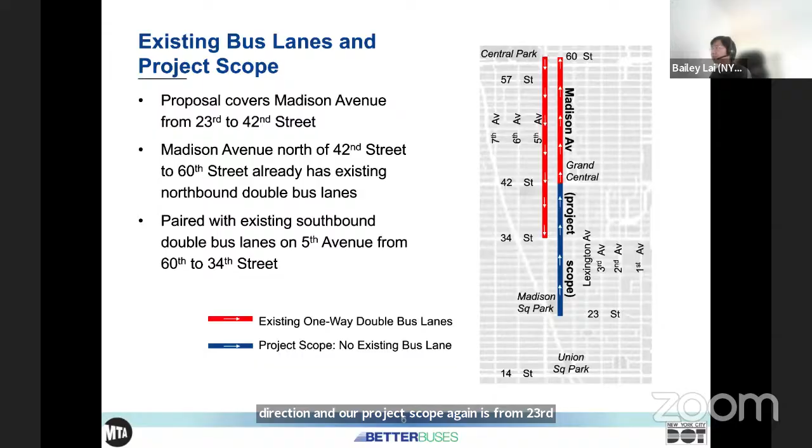Just to give you more visuals of double bus lanes, since not everyone is readily familiar with them, as you can see here, both 5th Ave and Madison Avenue have double bus lanes on the right side of the curb if you're looking in the direction of travel. I also want to point out that the 5th Avenue double bus lanes actually connect to singular bus lanes that extend the entire east side of Central Park, all the way from 110th Street down to 60th.

In our evaluation of the existing double bus lanes for 5th Avenue, we have much more recent data as it was implemented more recently in 2018. Between 2017 and 2019, the data showed that speeds on local routes increased 6 to 12%, and speeds on express routes increased 11 to 20%.

With that being said, I hand the mic over to Jamie to talk more in depth about bus routes and bus speeds on Madison Avenue itself.

Hello, good evening everyone. My name is Jamie Cho, and I'm a bus service planner at MTA New York City Transit. As Bailey mentioned earlier, 34 bus routes travel within the Madison Avenue study area, with 5 local routes and 29 express routes. Most of these express routes travel via the entire segment, with local routes beginning travel on Madison Avenue at either 25th Street or 32nd Street. On an average weekday, over 1,000 buses travel within the study area, with almost 8,000 daily aggregated boardings and alights at the bus stops there.

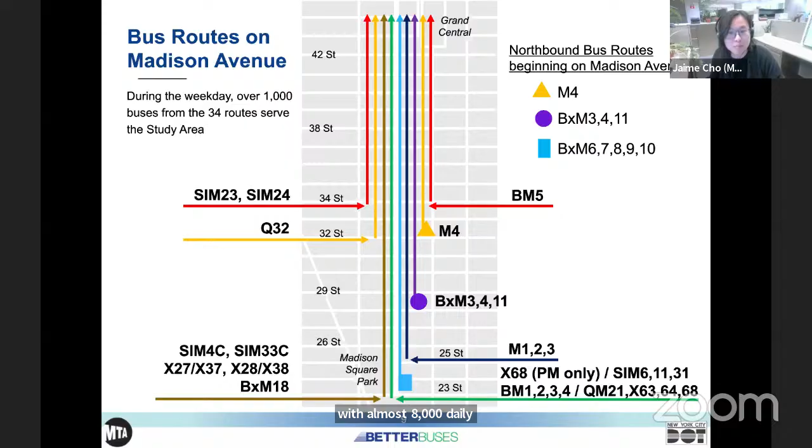If we go on to the next slide, the speeds: overall, local bus speeds are slow all day in the study area. These maps show the average bus speeds of the local and express routes on weekdays during the AM peak, midday, and PM peak. As shown, local bus speeds are under 6 miles per hour throughout the day, while express bus speeds are under 9. During the midday and PM peak, bus speeds are especially slow, with local speeds dipping down to 4.5 miles per hour between 27th Street and 33rd Street in the midday, and express speeds down to 5.2 between 33rd Street and 42nd Street during the PM peak.

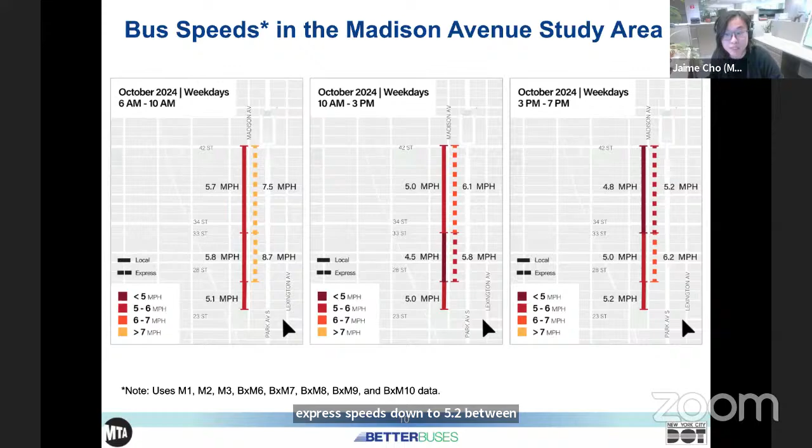So with that in mind, we also wanted to take a look at the existing general traffic volumes and speeds on the corridor to match up the data that we were seeing for bus speeds. Over here at DOT, we have done a traffic analysis to not just look at the traffic volumes and speeds, but also look at potential viability of our project proposal.

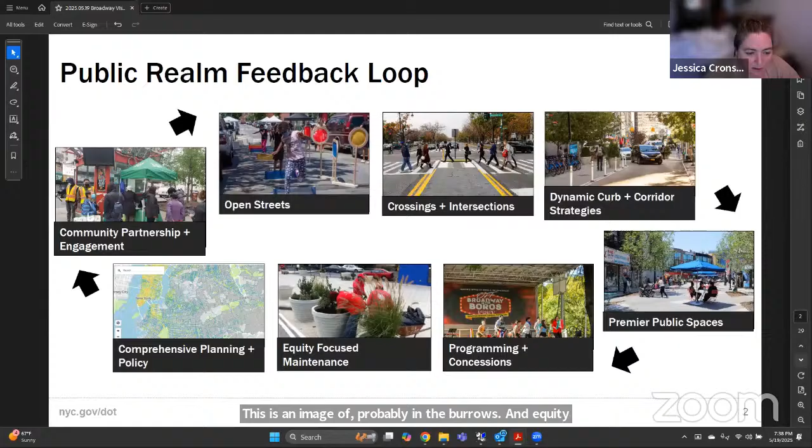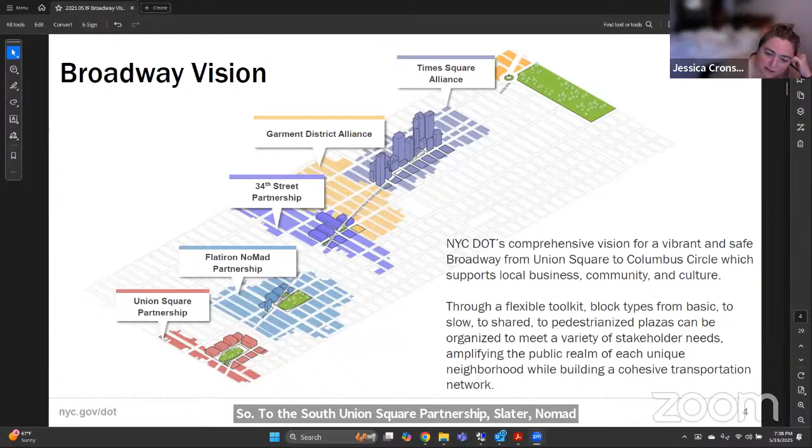Next slide. So we have been working on Broadway for many, many years now, and all of these efforts are made possible by our partnerships along the corridor. To the south: Union Square Partnership, Flatiron Nomad Partnership, 34th Street Partnership, Garment District Alliance, and the Times Square Alliance. Slide.

And that leads us into our 2025 goals: looking at a cohesive refresh between Herald Square and Times Square, creating a new plaza block between 35th and 36th, and updating the shared street geometry on 41st and 42nd, paired with comprehensive capital scoping. That's the project you've seen most recently between 38th and 40th.

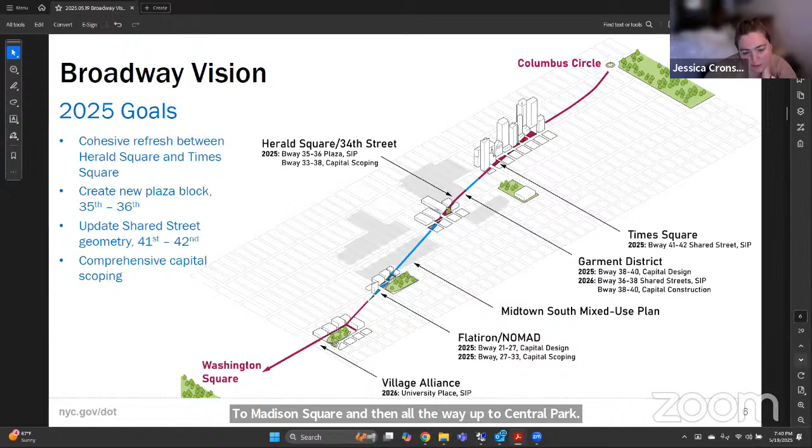This is an image showing a map of Broadway and how it cuts from park to park, connecting Washington Square to Union Square to Madison Square, and then all the way up to Central Park, highlighting the work we've been doing here across the years. Next slide.

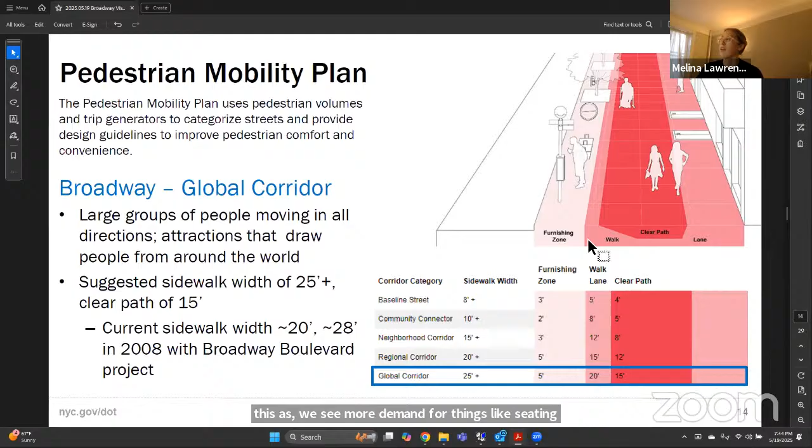Broadway has a lot of tourists, a lot of folks moving in and out. It's at our highest category, global corridor, which recommends a sidewalk width of about 25 feet. Right now we're at a full sidewalk width of about 28 feet after we added in some plazas and programming a few years ago. But we really want to think about this as we see more demand for things like seating elements and planters that live in the spaces we're creating, forming a furnishing zone.

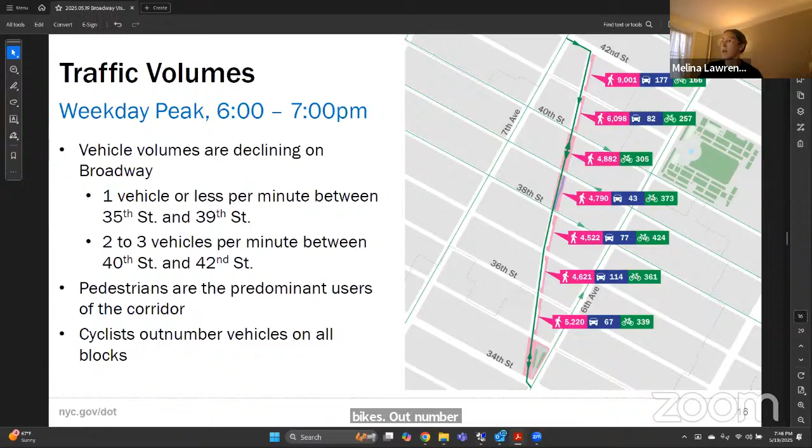So we've done a bit of public engagement and we have a survey open. We were out there on the street last Thursday between 12 and 4:30. We spent a couple hours in Garment District and then moved our way south towards Herald Square.

Majority of the folks that we talked to and have responded to our survey so far work in the area, or find themselves in the area for shopping, dining, and kind of leisure activities. Walking is the predominant mode used on Broadway, over 90% of respondents.

Thinking about the pedestrian experience, folks reported that they usually feel safe from vehicles on a scale from always, usually, occasionally, to never. Pedestrians also said that they usually feel safe from cyclists and other micromobility users.

From a cyclist or micromobility perspective, again the highest amount said that they usually feel safe from vehicles, but 22% reported feeling a little less safe occasionally, and 14% reported feeling not safe from vehicles ever.

We also asked about some of the plaza, shared streets, and two-way cycling, and got a mix of positive, neutral, and negative comments.

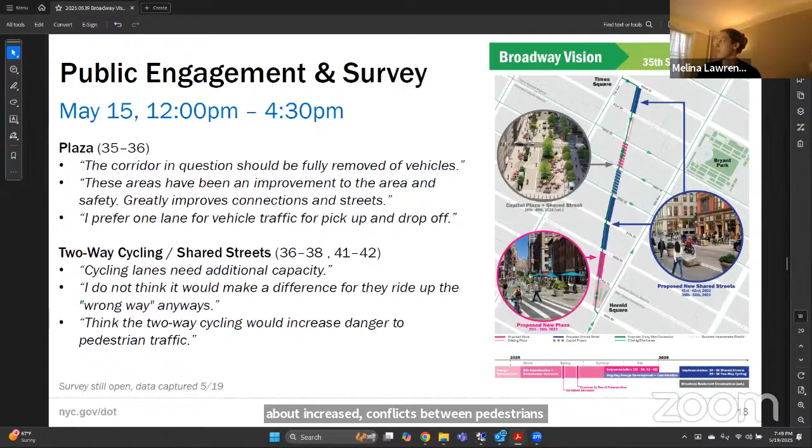As Jessica mentioned, we're looking to phase this out over 2 years, so there are 3 diagrams. One showing the existing conditions, which are 2 plaza blocks, one in Herald Square between 34th and 35th, and another between 39th and 40th, a shared street between 38th and 39th, and then the rest of the corridor is kind of like a slow block typology where we just have that pedestrian or plaza space attached to just the east curb.

In 2025, highlighting the 2 blocks that we're looking to do this year: the plaza block adjacent to the existing one between 35th and 36th, and then looking to improve the geometry between 41st and 42nd to more of a shared street design.

So adding in a bit of chicaning to keep vehicles slow, and then also adding some additional materials shown in the images at the beginning that Jessica went through, where we have an additional brown epoxy gravel added to the travel lane.

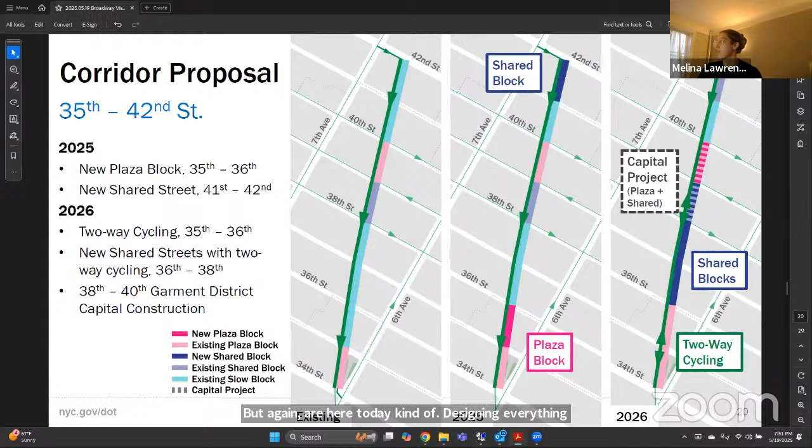Now moving into the renderings for the design. This is Broadway between 35th and 36th, where we're looking to do a plaza block and expand the programmable space adjacent to Herald Square. As Jessica mentioned, they did a holiday market in the open street and are looking to continue doing similar events.

So in 2025, we would look to maintain southbound cycling, expand the amount of plaza space that exists on this block, and then also reconfigure the existing CitiBike station. Currently, that lives where this green paint is. We would look to move that, relocate it somewhere in the vicinity.

And then in 2026, once 36th to 38th begins, we would convert this block to two-way cycling. What we'd implement this year would feel like an extra wide bike lane, because next year we would add a yellow center line down the middle and make it two-way.

Sorry, jumping in super quick, just to add to that — that width is also necessary because that is also the FDNY access path. Yeah, thank you. Yep.

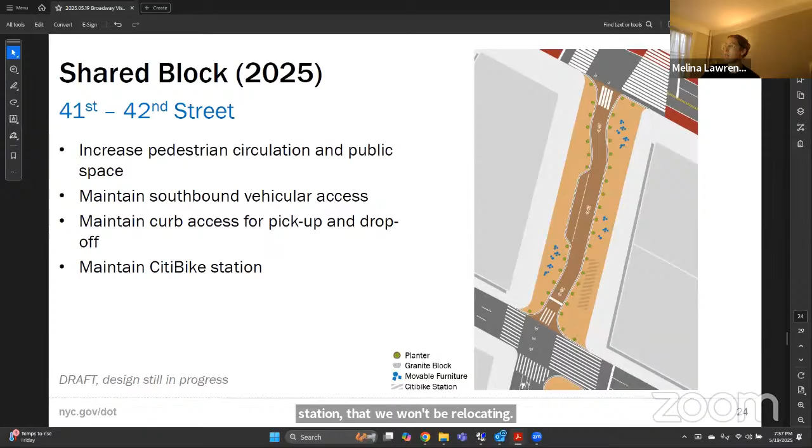Taking a look at curb management, right now the existing regulations are called out on the blocks we're working on. There are two diagrams, existing and proposed, highlighting curb regulations between 35th and 38th and 41st and 42nd. Right now the regulations are 3-hour commercial metered parking during the day, transitioning to 2-hour metered parking in the evening, with a little bit of no standing any time between 41st and 42nd.

What we're looking to do is maintain those existing regulations where we're maintaining curb access, and based on feedback from specific stakeholders between 41st and 42nd, and between 36th and 37th, we're potentially looking to add no standing any time, which would facilitate pickup, drop-off, and quick loading for events. But as with the 36th to 38th blocks, this is still a little bit in flux as we continue conversations with stakeholders.

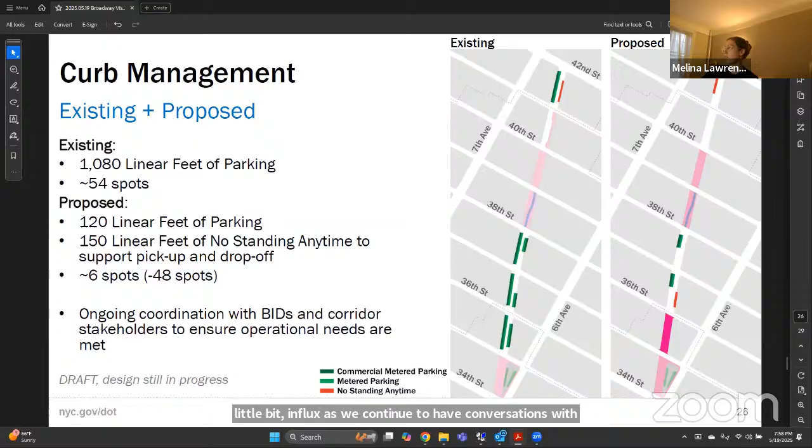And then the last thing is timeline. We kind of started this kickoff after the holiday market meeting with the BIDs, which include 34th Street Partnership, Garment District Alliance, and Times Square Alliance, and have been meeting with some of their stakeholders throughout the course of winter and spring. We did some on-street outreach and a survey last week and are here with you all today.

Looking again to implement 2 blocks this year, the plaza between 35th and 36th, and the shared street between 41st and 42nd. And then in 2026, once capital construction starts, the 2 other shared street blocks between 36th and 38th, and then just adding that yellow center line to the bike lane between 35 and 36. And that is the end of the presentation. If there are any questions, thank you.

Thank you so much. I think this is one of the most important projects in all of New York City. So thank you. And this is long-term. And if we can remain future focused in our thinking, it'll be tremendous. I'm so pleased that Office of Public Realm is involved, because almost every single city agency and department will have to be involved, certainly all the BIDs, all the committees on this board. So thank you so much.

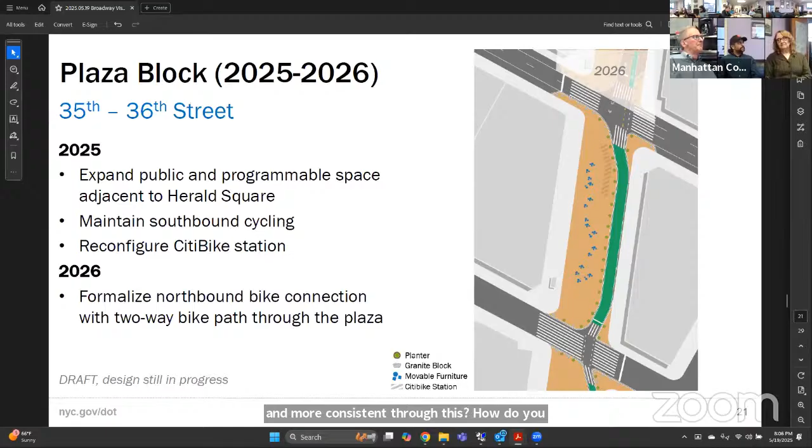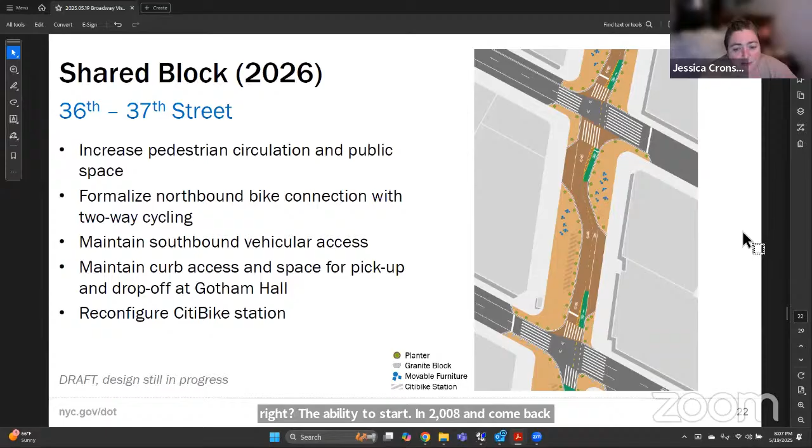What a good question. I think we've landed on a design language based on the experimentation we've been doing over the years. As I said at the beginning, we've been given the gift of time on Broadway, the ability to start in 2008 and come back multiple times to the same location on the corridor, and then have that inform the capital project. With in-house materials - Melina, do you want to pull up the capital rendering super quick?

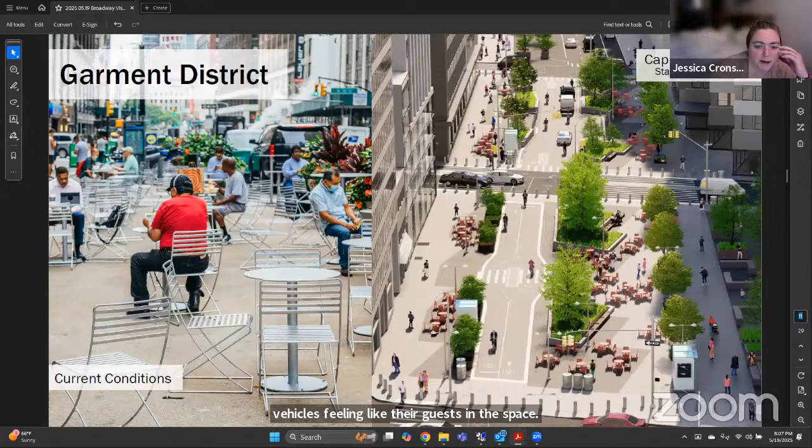I think there are a couple of differences. With the capital project, we're able to fully raise the street, we're able to add things like bollards and raised planters, so the toolkit is a little different. We're able in the capital project to keep a straighter shared street, but it will still feel shared, with vehicles feeling like they're guests in the space. Whereas in the in-house materials, because everything's at the same level, we're a little more dependent on geometry changes. The geometry of the chicane helps to both slow traffic - it physically limits how quickly people can drive through the space, but also signals that cars are in a different kind of space where pedestrians and cyclists are the priority.

These are things that we've been able to learn. Some of the things you're seeing repeated are that chicane, but also the yellow dashed line and the green paint at the beginning and end of the block to indicate to drivers and give cyclists a little guidance, as well as some of the other treatments that we're repeating and bringing back from those previous phases.

As part of the MSMX rezoning, our land use committee, with input from this committee, is really pushing for funding for the whole corridor, MSMX, 23rd to 42nd, as open space, as a public gathering area. So it may hopefully accelerate the timeline on some of these things as well, and some of these may end up being temporary for a shorter period of time. That's why I asked about whether you see your timelines compressing as this design language compresses, because we're hoping those resources will be available to make this permanent on a faster schedule.

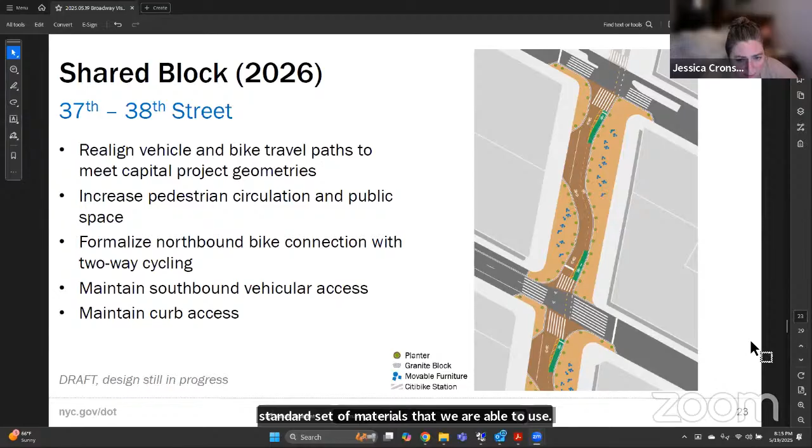We have a standard set of materials we're able to use: markings, epoxy gravel, green paint, and edge objects like planters and granite blocks. On these shared streets, while we're slowing vehicle traffic with the chicanes, we're giving pedestrians a bit more buffer with edge objects like planters and granite blocks, while micro-mobility and cyclists use the shared space.

Nancy, would it be possible to mount cameras along some of these proposed areas to actually watch the cyclists and see what they're doing, so we could have a record of that? I don't understand why we in Community Board 5 are constantly talking about protecting pedestrians from cyclists and micro mobility vehicles. They're vehicles. Buffers are one thing, but surfaces are very different. If you have surfaces that are unfriendly to wheels, they're not gonna go there. Otherwise, they're gonna go straight and fast wherever they can.

But I'm seeing a lot of raised hands from the public, so I can be quiet. But my question is, can that be monitored with cameras so we can see live pictures of what's going on? I mean, so we can take some time lapse footage and report back. During rush hours? Yes, when we take counts, we mount cameras. I'm not sure if we have the footage anymore, but we can always mount more cameras, and during high delivery hours.

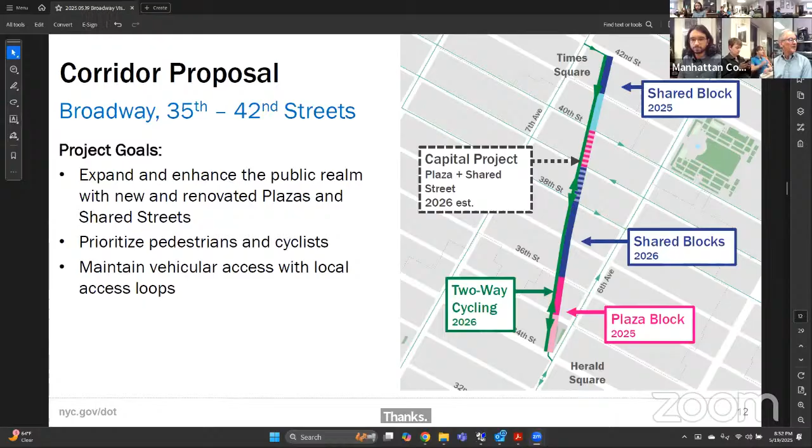I think our goal on these has been to collect public comment. So in the earlier versions of the 34th Street resolution, we basically expressed support for it, but then presented the arguments that the public made during the rest of the meeting. And here, certainly the idea of having some sort of workshop to dig into this a little bit deeper was mentioned. Specific requests people had: the question of re-examining the plaza block from 35th to 36th, whether that needed to be closed to traffic.

What else was raised? Flexible delineators being tripping hazards. What else was raised? There was someone who asked the opposite - about re-examining the plaza block or creating a plaza block, saying that we should not close the street to traffic.

The poor markings - not knowing which bike lane does which and where. It's green and then it just goes around, and what does that mean? And there was one comment about doing a two-way bike lane with protection, fully separated from vehicles and not having bikes go into oncoming traffic - someone on a bike riding headlong into car headlights, not knowing what was happening at the end of that, where the bike and the car meet.

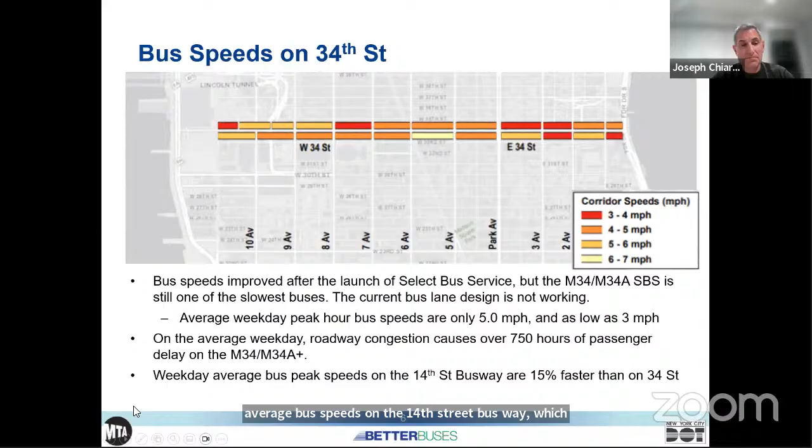You're on mute, Rachel, you're muted. Sorry about that.

Thanks, Joe. So talking a little bit about our work to date, as we mentioned, the bus lanes were originally added in 2008 and then upgraded in 2011 with the launch of the M34 Select Bus Service. Some bus bulbs were also added, with work still underway at 8th Avenue on the final one.

More recently, this past fall, we did some on-street engagement with pedestrian intercept surveys and merchant surveys. We also presented our existing conditions presentations to you all earlier this year in January and February. And today we'll be talking about a draft proposal.

So just briefly talking about community feedback, we heard about overcrowding on sidewalks, long crossing distance, slow bus speeds, and the need for loading space on the corridor. Of course, we also received requests for a 24/7 14th Street style busway, sidewalk widening, and other pedestrian safety elements, and a request for redesign and regulations to facilitate the deliveries that are so vital for 34th Street.

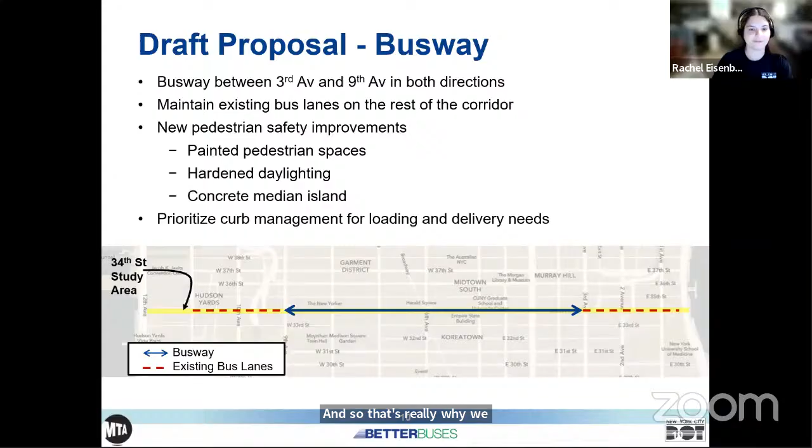All right, so moving along to what is a busway. I'm sure many of you are familiar because 14th Street is a nearby example, but on our busways in New York City, we allow buses, trucks, emergency vehicles, and Access-A-Rides to travel along the whole corridor. Other vehicles are allowed to turn onto the corridor, but must make the next available and legal turn. This ensures vehicle access, but also creates those forced diversions to help reduce congestion on the corridor. This helps make bus service faster and more dependable because of the reduced congestion, and also allows loading, deliveries, and customer access for the various businesses and land uses on the roadway.

So we'll briefly go over many of the benefits of a busway: prioritizing truck and transit and allowing us to enhance the pedestrian experience. We looked to 14th Street as a nearby case study. The 14th Street Busway was launched in October of 2019 in conjunction with the M14 A/D Select Bus Service launch. There we saw bus speeds increase up to 24%, and crashes decreased by 42%, with minimal travel speed changes on streets around the busway, where we would expect those diversions. We also found that people felt safer crossing the street, and felt like bus service was faster and more frequent post-implementation.

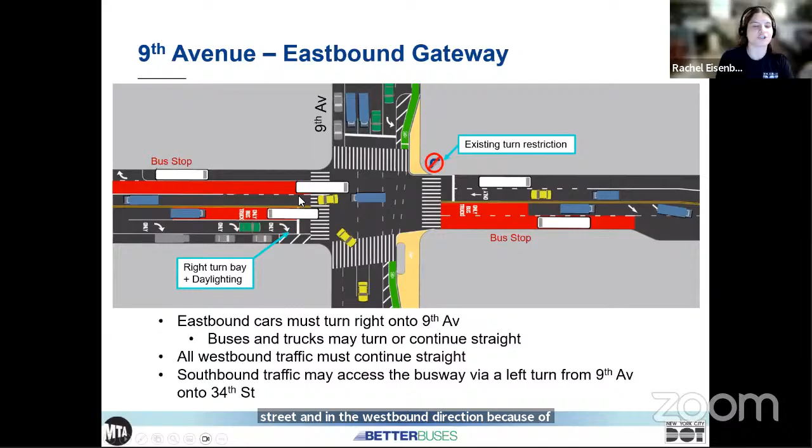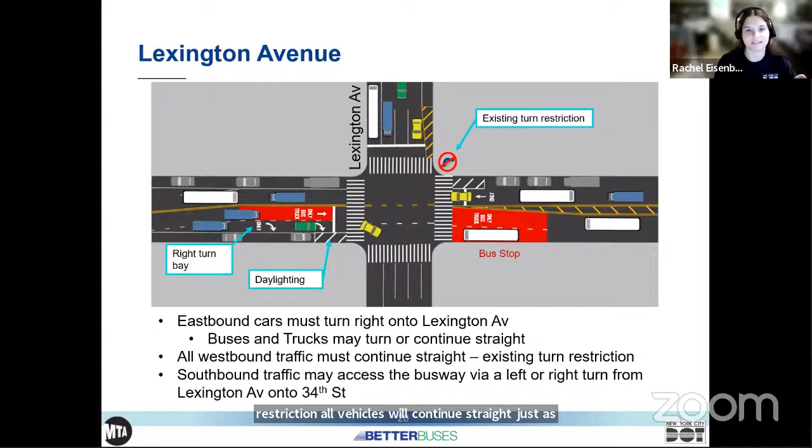At Lexington, similarly, a right turn bay in the eastbound direction—only buses and trucks will continue straight. Westbound, due to existing turn restrictions, all vehicles will continue straight as they currently do, with access to 34th Street via Lexington Avenue through either left or right turns. And then we get to our 3rd Avenue gateway.

So similarly, we have this new right turn bay in the westbound direction at 3rd Avenue with some new daylighting to help increase visibility, especially since we are forcing all of the vehicles to turn here that aren't buses or trucks.

In the eastbound direction, traffic will continue straight just as it currently does because there are existing turn restrictions. Again, northbound traffic can access the busway via a left turn from 3rd Avenue onto 34th Street.

I'll also note we're proposing a new median island here in concrete to shorten the crossing distance and help protect pedestrians.

We are also hoping to upgrade the existing mid-block crossings, some of which fall within your district. These are all existing crossings, but we're hoping to add some painted pedestrian space that extends beyond the curb to help shorten those distances, because we know it can be quite a long distance to cross.

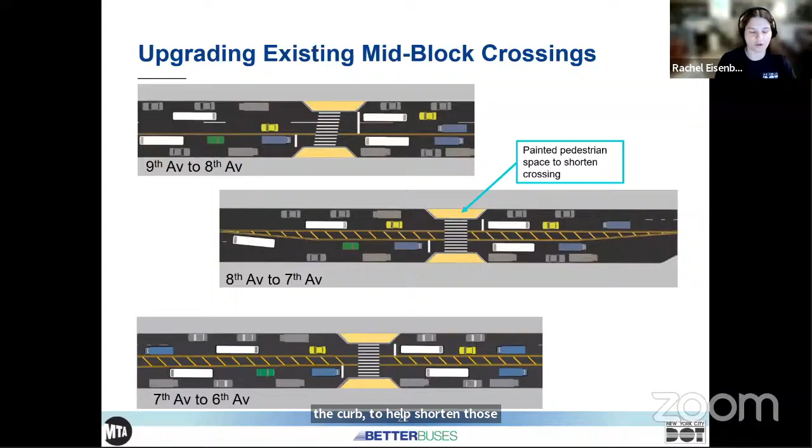All right, so I'll briefly talk about enforcement. I know Bailey talked about enforcement a bit earlier, but we have both ACE cameras - those are the on-bus cameras that the MTA runs - and we also have fixed location cameras that are in effect on 34th Street today. As a part of a busway launch, we would just update for the new regulations.

I'm going to briefly touch on traffic analysis now. So we're still working on our traffic analysis. It's ongoing, but just to give you an idea, we know that this is a really important corridor. And even though we're only looking at changes along 34th Street, we know that because of its unique position in the heart of Manhattan between two major tunnels, it has impacts on traffic much larger than just the corridor itself.

And so we are using dynamic traffic modeling to explore how our proposal will affect traffic patterns on Manhattan avenues and other crosstown streets between 66th Street and 14th Street. And when we do have those results, we'll be able to provide them to you all. As I said, we're still working on this today.

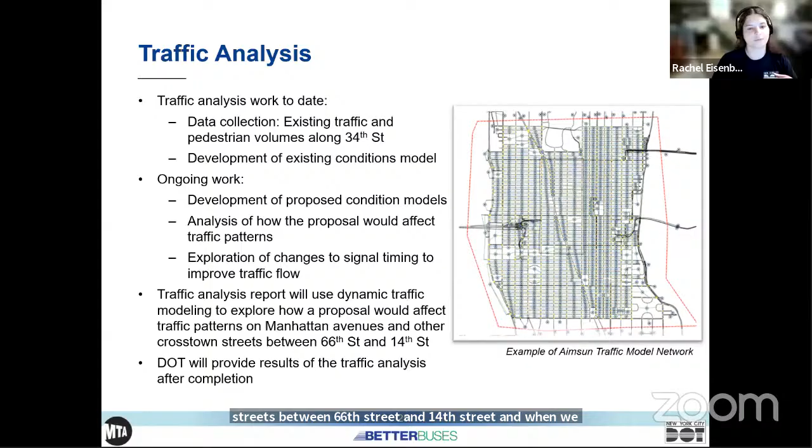What we have done is looked at some origin destination data to see where drivers are going on 34th Street. I'll quickly go through these. This data uses things like in-vehicle GPSs and apps like Google Maps or something like that, where you've agreed to give them your location to tell us where your vehicle's going on a given corridor.

So through this, we've found that a very, very small percentage of vehicles traveling along 34th Street have a destination on the corridor, only 1%. 28% are going directly north or south of 34th Street.

Sorry, was that a question? No, it's just someone coughing. Please keep going, sorry.

24% of vehicles traveling on 34th Street are going to other parts of Manhattan, and 47% of vehicles traveling on 34th Street have destinations in other boroughs or beyond the city limits.

So this kind of information helps us look at what are other paths that vehicles might take, what are areas we might want to prioritize for making sure that, you know, are there going to be traffic hotspots, all of that. But it really shows us that those tunnel connections are likely very important for drivers that are currently on 34th Street. So how can we accommodate them on other roads as well?

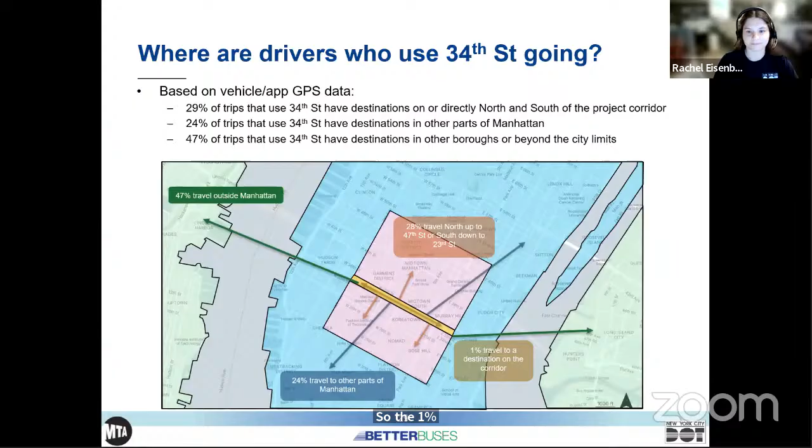So two questions that also came out of the preview that you gave us. The 1% that are doing business in the corridor, there are a number of areas where you showed us kind of gray vehicles.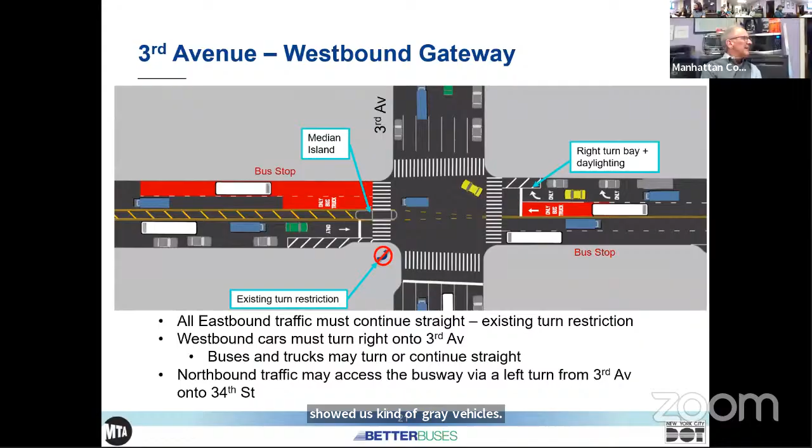Is that parking? Is that loading? Is that the 1% that we're accommodating in those areas? So the gray vehicles, this wasn't a great slide. Okay, this one's okay. The gray vehicles are there to symbolize what a parked vehicle might be. Obviously the current curb regulations on 34th Street are very restrictive, and there's almost no parking and loading in a midday period.

For something like renderings, I think they can be really helpful for just showing how space can be used. It can be hard to picture if that's enough space for a vehicle. So in this example, they're illustrative of the more frequent use of overnight parking and loading for something like a truck on 34th Street, versus the white buses and colorful vehicles, which would be the moving vehicles on the corridor.

One of the questions that came up last time we looked at this was a concern about adequate loading for all the retail businesses, everything that fronts on 34th. So these areas are the areas that would address that primarily. Yes, one of the benefits of the busway, especially for those blocks where we currently have existing curbside bus lanes, is it gives us the opportunity to open up that curb space to reevaluate how we can best use it on this corridor.

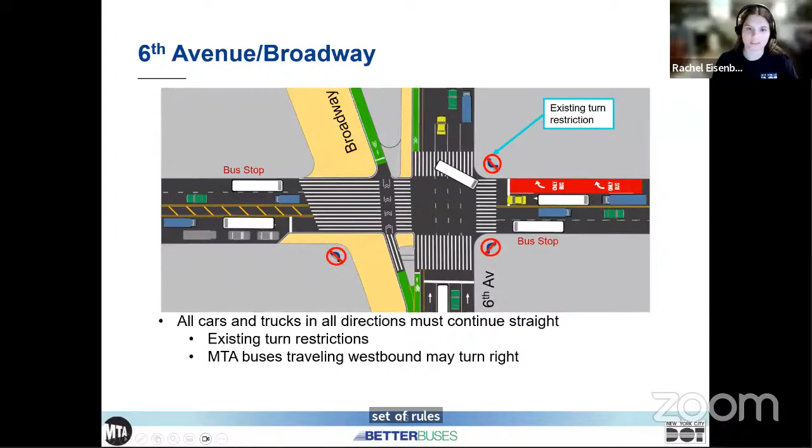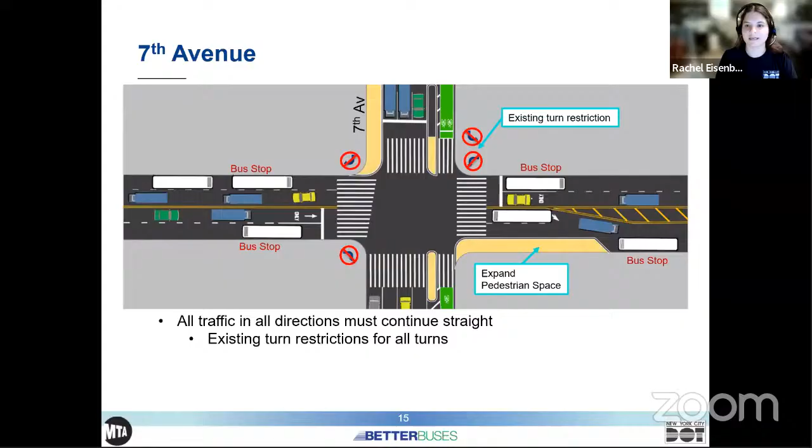No, it's the same. Sorry, maybe my rushed presentation may have given some confusion, but no. We do have blocks like 6th Avenue and 7th Avenue which have these existing turn restrictions where all vehicles must continue straight, and those will remain in place. But at something like 5th Avenue, if you're traveling south on 5th Avenue, you can make a right turn to go westbound on 34th Street, or a left turn to go eastbound on 34th Street.

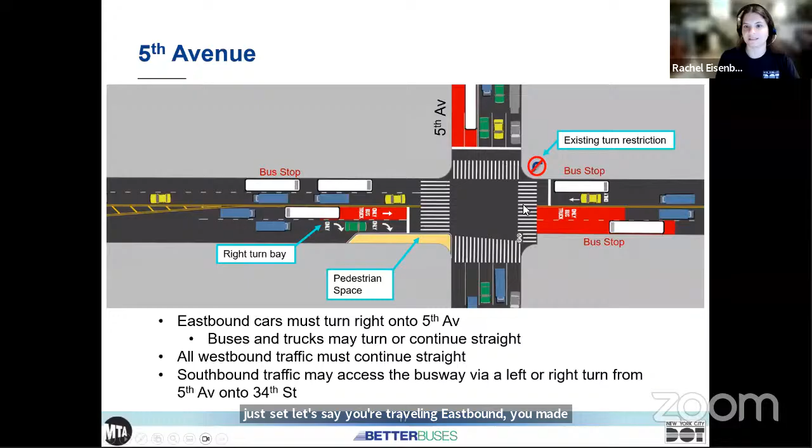Let's say you're traveling eastbound, you made that left turn here. You're in this little yellow car and you make this left turn onto 34th Street. At Madison Avenue, because there's a turn restriction, you would continue straight through. Then when you got to Park Avenue, all of a sudden now you have an only-bus-and-trucks-continue-straight regulation, so you'd be required to make this right turn from 34th Street onto Park Avenue. So you'd still be able to access the blocks between Park and 5th Avenue, that's how you would do it.

So every block in this busway scenario is accessible by general vehicles, whether that be a personal vehicle, a taxi or ride share, or some other vehicle usage.

Thanks. What does hardened daylighting mean? Yep, no problem. Hardened daylighting would be something like if we had channelization, we could have some vertical elements like vertical delineators, maybe some quick curb, which also has a vertical element to it, or things like granite blocks or planters, which I'm sure you're all familiar with from Broadway, which has many. So something that physically prevents a vehicle from illegally parking or standing in an area that's supposed to be daylit, but doesn't rise so high that it blocks the view, or lessens that daylighting effect. Thank you. Does that help? Thank you, yes.

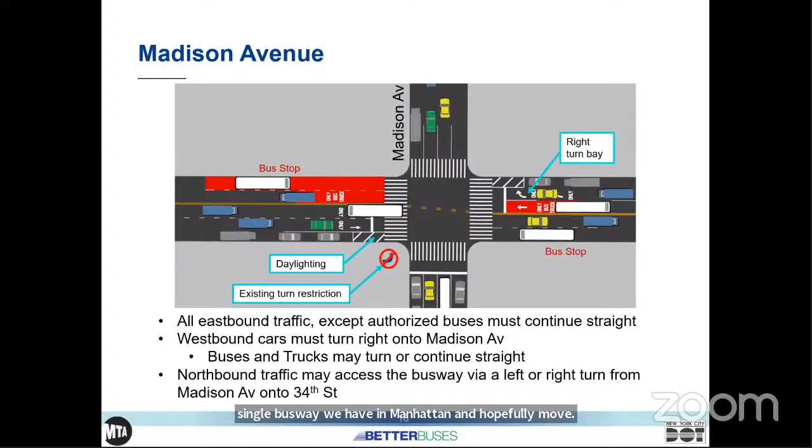Well, I'll take this one. Take one for the team. So, I mean, we were very clearly supportive of this whenever we passed that last reso. So I don't think anything has changed as we've seen more detail.

Yeah, I worked on that one. I think the only two things I'd want to put in the resolution that we may want to call out separately: one, I don't want to tell other community boards what to do, but I think we should have some language that says, if the other community boards do want it end to end, river to river, that we fully support them in that endeavor. And then two, I do think it's worth calling out, looking for where it makes sense to have bus shelters and seating and cover for the elements at as many bus stops as possible on 34th Street.

Okay, and we had called for adequate loading for 34th Street businesses, so there wasn't really that much detail on that, so we'll have to address that as well. Anything else that you heard that you want to call out?